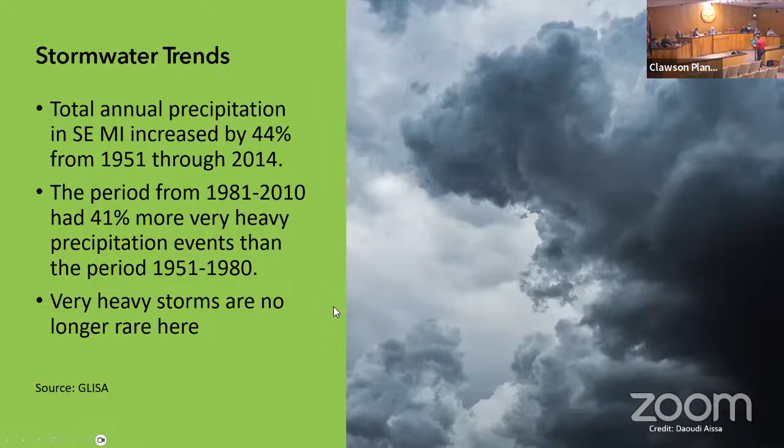So that's the context in which we're operating. A little more context, some basics. Water is carried away from local collection points by county drains, waterways like the Rouge River, and then sewers. In Clawson, nearly all of our water goes into the sewer system. We're a very built out community. We only have a couple little dribs and drabs of actual county drain that are even in our boundaries.

We don't have any open water systems like rivers or ponds that would collect water within our city limits. We're in the OAK drainage district of the Great Lakes Water Authority's 40-year wastewater plan, and that lumps us in with Oak Park, Royal Oak, Berkley, Birmingham, and a few other cities, most of Troy as well.

The boundaries of those districts are partially based on the watersheds. You can see the kind of ragged line around the pink there - that's the watershed boundary between the Rouge and the Clinton River watersheds. But then the other boundaries are political boundaries, like the north end of Troy and the boundary between Oakland County and Macomb County.

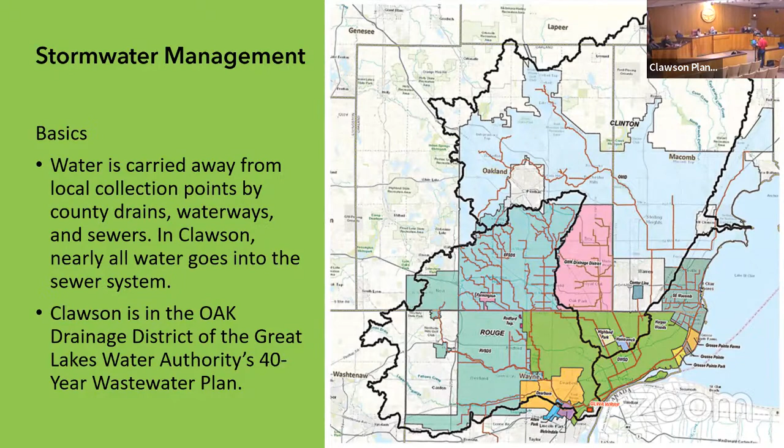We also, in Clawson and a lot of the cities to the south of us, have a combined storm and sanitary system. So you can see here, this is the full system - all the gray. The light gray is separated systems, so you have a storm system and a sanitary system. The dark gray is where you have your combined systems - all the storm and sanitary winds up in the same pipe when it's heading toward the water treatment plant.

Capacity downstream does determine how much we can put into the system without causing problems. There is a lot of capacity downstream.

Also important is that everything flows downstream, and there's a lot of things in the system that are further out than we are. But that doesn't mean that water is coming from across Maple and going right into all of our small pipes. There are large interceptor systems that take all of that water, so it's not like a totally cumulative effect coming down from, say, Auburn Hills through Clawson, through Hazel Park, through Detroit. You have larger interceptors that everything is directed toward.

So all of our pipes are going toward their various interceptors, and so is everybody to the north of us. Our water just generally goes downstream to treatment plants. There are about 60 treatment plants in Southeast Michigan, spread throughout the region.

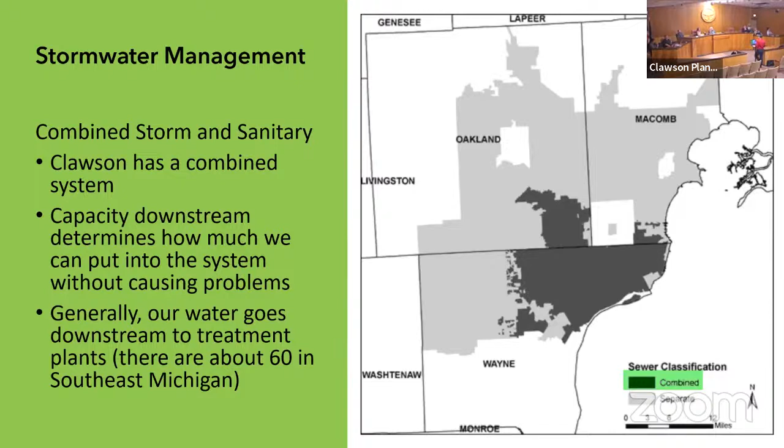Just important to know that our sanitary and our storm water collection is a combined system, so if you have an event that causes backflow, you might get some of both coming out of the system. That's the way it was done - if you look at the map across the country, older communities have these combined systems, and we don't build that way for a reason now. But retrofitting a system to separate those things is incredibly costly, because you literally have to replace miles and miles of pipes that are all underground. So it's not likely to happen anytime soon, let's put it that way.

We also have a little bit of a lead pipe legacy being an older community. This is a little less to do with sewer than it is to do with water, but a lot of our water service lines were originally made of lead. The city's been replacing them on a kind of as-we-go basis over the years. We don't really have that many left, but there are still some. So when an older building comes in for some sort of improvement, if we're looking at the water, generally we're looking to replace those lead service lines with a more modern material that is less likely to cause a problem if the wrong chemical gets put into the system, as happened in Flint.

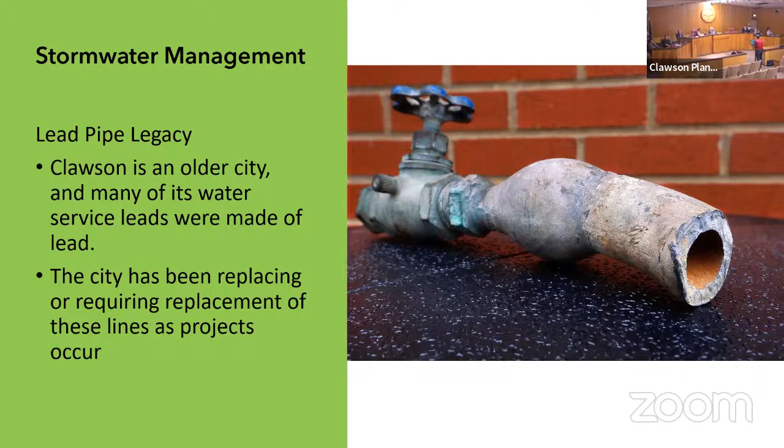So what happens when it rains? Soils matter - some soils are more permeable than others. If you have sandy or loamy soils, they're going to soak up a lot of the water. If you have clay, it's going to sit on top and roll off. We have a lot of fill in Clawson. It's not as bad as where I am over in Berkley - it's like all fill because it was a swamp once, and it's all this horrible packed clay, and the water just sits on top of it and flows.

Exposed ground absorbs water at a rate that corresponds to the soil type. So if you have a lawn or a forest area or something, whatever kind of soil you've got there is going to determine the rate of absorption. However, if you have land that's covered with impervious surfaces, pavements, or buildings, that water isn't going to be absorbed and it's got to go somewhere. So we have to figure out where to put it.

Hey Joe, can we ask questions along the way? Sure, yeah, absolutely.

So I noticed on, I think it's Rochester Road by the park in Royal Oak, when they're repaving, they almost have like this berm, and it's familiar to me in like northern Macomb and Oakland County, where it's where stormwater can collect and kind of flow alongside the roadside.

Is that something that we've considered? What are those called, first off? Well, what you're seeing there is probably a swale. You're going to see a diagram of it later in this presentation.

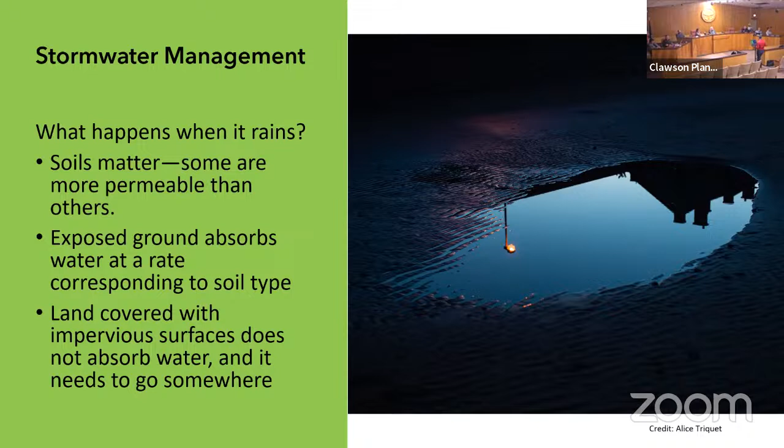But like we said, in the built environment, everything that's hitting those roofs, everything that's hitting those parking lots, everything that's hitting those roads — that water's got to go somewhere. And if it's flowing unimpeded, it will go there fast too. That's another thing to think about, because the speed of water influences the rate at which it erodes the things it's flowing over. So detention versus retention is an important concept to understand.

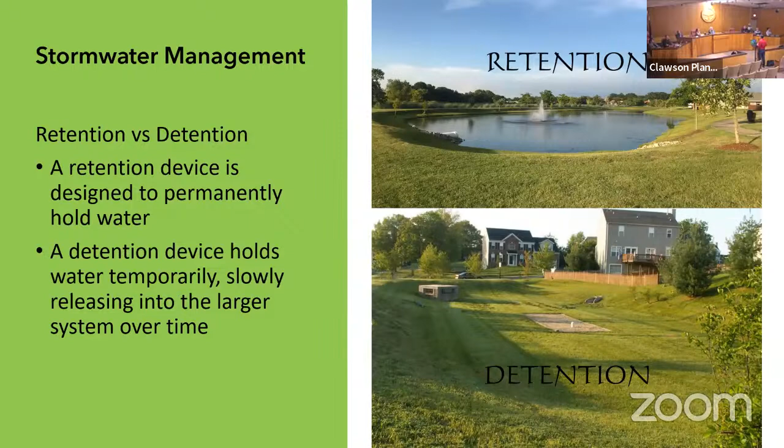So we can talk about different types of retention devices. Surface storage: you've got a pond on the surface, essentially. This happens to be a retention pond, but it just looks prettier than a detention pond, so I like the photo more.

It requires substantial land area because you do have to have the space to put that water on the surface. We don't have a lot of surface retention in Clawson because we don't have the space. The more pavement you have, the bigger the area of the pond needs to be. So when you have sites that are mostly paved out, you're not really leaving any area for the pond.

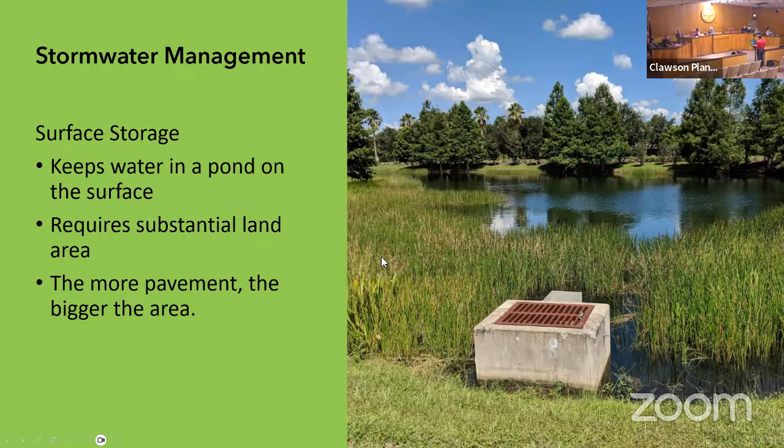Which is when we switch to the most conventional alternative, which is underground storage. So you bury oversized pipes or tanks underground to hold the water. This is our best option, generally speaking, just because of the nature of our community where we have a built-out environment. We have to find a place to put the water, and that's generally going to be under what you're paving, because other development can be placed on top. This will hold the water and gradually release it into the stormwater system and take it away from the city.

What keeps the water from flowing out at a high rate is called a restrictor valve. So you basically have a huge pipe that the water is sitting in, and then you've got a smaller pipe that allows the water into the storm system. It just restricts the flow so that it doesn't go in as fast and overwhelm the system.

Is this the standard for some of the new developments we've seen? They've said 100-year retention. Exactly, yeah. So when the parking lot was redone over at Ace, a system like this went underground below that parking lot.

I watched them do it. The Trader Joe's down on Woodward, they did it a few years ago. They put these huge pipes under the parking lot there, and it was quite a thing to watch. They were very, very large pipes. A lot of water can sit under that parking lot.

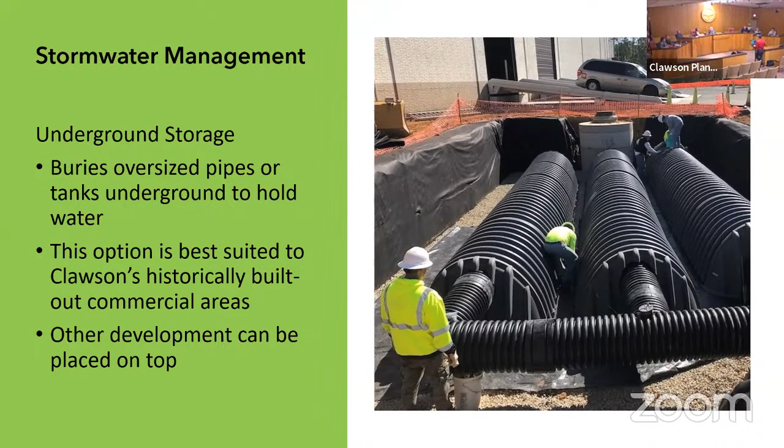Another thing we look at with these detention systems is water quality. You can have filtering devices in these systems, and they can come at either end. A lot of systems filter water as it enters the retention device, but you can also filter it at the point of release. The point of entry is usually the easier place to clean out, so that's the more common place to put it. Also, you don't have filthy water sitting around if you're filtering it on the way in.

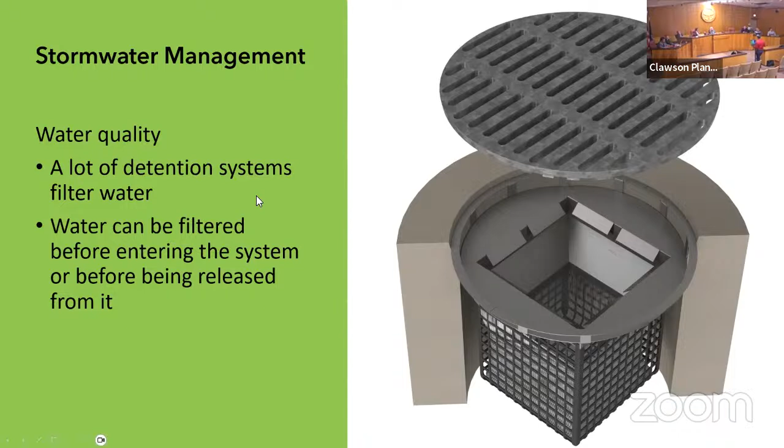But it's an access point to the system that facilitates maintenance. Typically, at the bottom of that manhole, you can climb down to an open channel. It might be an opening in a very small pipe, or one large enough to walk through. A lot of the scenes in The Third Man take place in the sewers of Vienna, which are massive chambers that are actually quite beautiful. A lot of larger, older cities have these incredible sewer networks—strikingly gorgeous old brick tunnels with a lot of headroom that you can actually walk through pretty easily. They even have walking paths next to the channels.

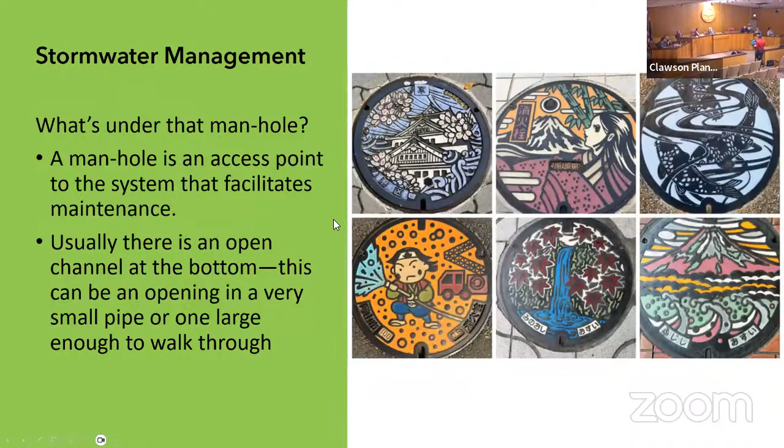So we have some typical infrastructure elements that you'll see. You'll see catch basins—this is an example of a catch basin. These can be in the middle of a parking lot, or over at the curb and the gutter.

Pipes, restrictors, which I was just talking about. Clean outs, which is a filter. You have to have a point where you can get in there and remove the filter, get all the crud out of it, and put a new filter in.

Gutters and curbs are part of the stormwater management system because they channel the flow of water. So if you have a road, it's pitched so that the peak of the road is in the middle and the water flows to the edges, down the gutters, and into the catch basins. The curbs keep the water from flowing off the road and onto people's properties.

French drains are another one. They're typically used in a yard that floods or something. It's a pipe that's perforated that gets buried, and as water seeps into the ground, it'll go into the pipe and be directed more rapidly away from the area that's flooding.

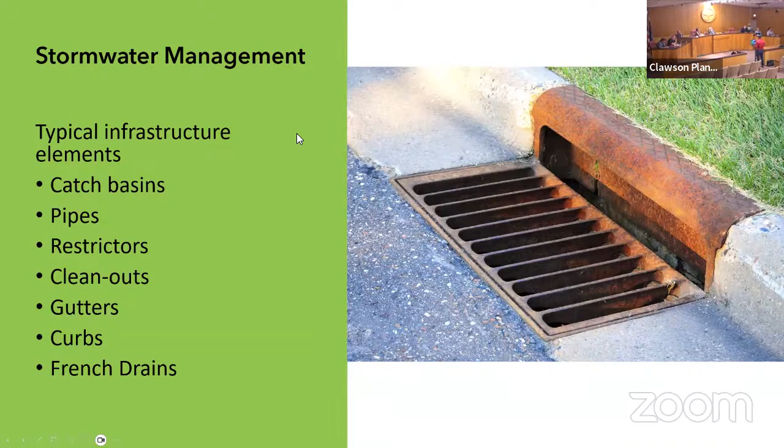We have to keep track of the condition of our stormwater infrastructure. So one of the tools we have to do that is these little robots, or lines with cameras on them, that you can run through the pipes and actually look at the physical condition of the pipe from inside the pipe.

And you can find cave-ins, you can find cracks, you can find obstructions, you can find just areas of buildup that you might want to look at removing—you might do that chemically, you might do that ultrasonically. There's a lot of different ways to do these things now.

But when you see the reports that we looked at a couple meetings ago on the condition of the sewer system, this is how we find that out. So you run these inspections periodically, ideally, and hopefully you're scoping your whole system over the course of whatever period you set. But this is really the nuts and bolts of how we actually determine what the condition of these pipes is.

So the city owns one of these? I think the city does have at least one. We have our own, yeah. I couldn't say the brand, but that's something we can get for you.

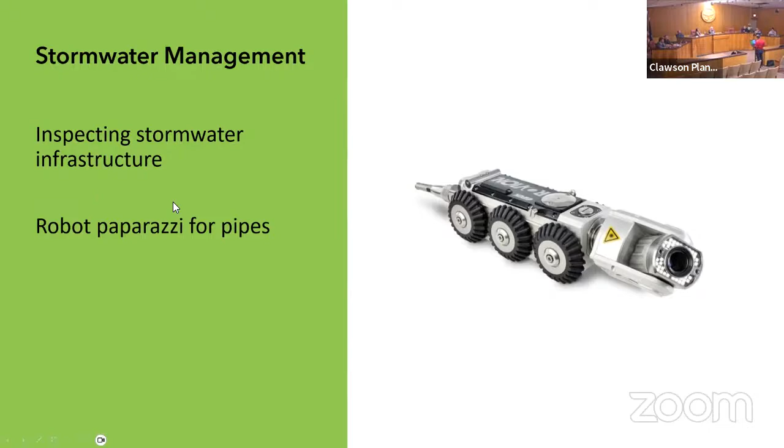And if you want to get really advanced with some of these robots, some of them are equipped with GPS, so you can get an accurate location—like, underground, of where the pipe is. So before digging, or if you wanted to get a sense of where your pipes were, you'd know exactly it was right here underneath the road or underneath the sidewalk.

Yeah, it's very useful. I mean, why dig up a whole area to try to find a pipe if you can just dig straight to it? You get the little beeping dot, like Alien or something.

So looking at a couple different alternative stormwater management systems, there really aren't that many of these because they're all kind of similar in various ways. You've got a couple of different bioretention options.

So you've got rain gardens. Generally what they do is collect water for slow filtering into the ground. The soil mix is usually chosen to filter out contaminants.

They do need to be cleaned because they tend to collect rubbish—water is designed to flow into it, right? So if somebody dropped a napkin on the ground in a parking lot or something, that napkin is going to ultimately end up in this rain garden. So they do have to be cleaned out. You can manage that with traps and filters at the inflow points, so you have less ground to cover when cleaning them up, but they definitely require attention.

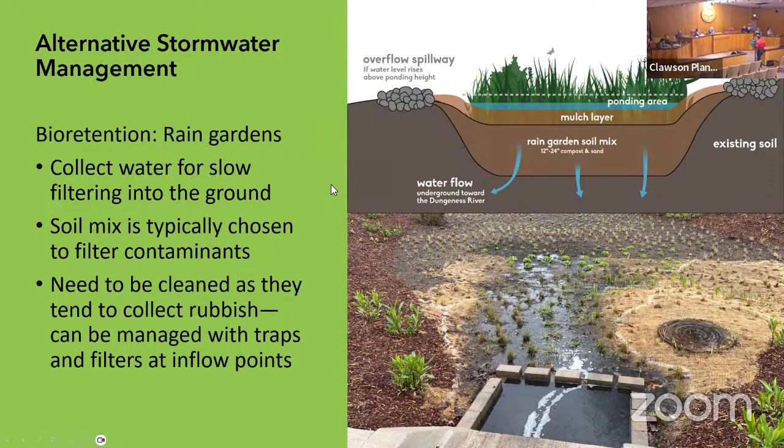The next item is the bioswale, which we were talking about earlier. It's similar to a rain garden, but usually includes a pipe to direct collected water that's been filtered—the same type of pipe you'd find in a French drain. It's got perforations in it so the water seeps into it rather than flowing in from an opening like a catch basin.

You have certain types of plantings coming down the side, and plantings in the middle where the water actually pools up. Those plants are generally chosen for a couple of purposes: one, they might slow or absorb some of the incoming water so you don't have as much of a rush entering the system; and two, since they're in the area where water pools, they're water resistant and may filter out chemicals or toxins from the water, holding those in the plants themselves.

Generally, you'll put some sort of engineered soil under the area that pools up, so you're not just using whatever topsoil is there. You have a specific mix that allows water to infiltrate while pulling out chemicals and toxins through biological processes. Typically the perforated pipe is surrounded by gravel, which allows water to flow through to the pipe. There's generally some engineered soil below that as well, so you're continuing to filter the water as it moves past the pipe toward the water table.

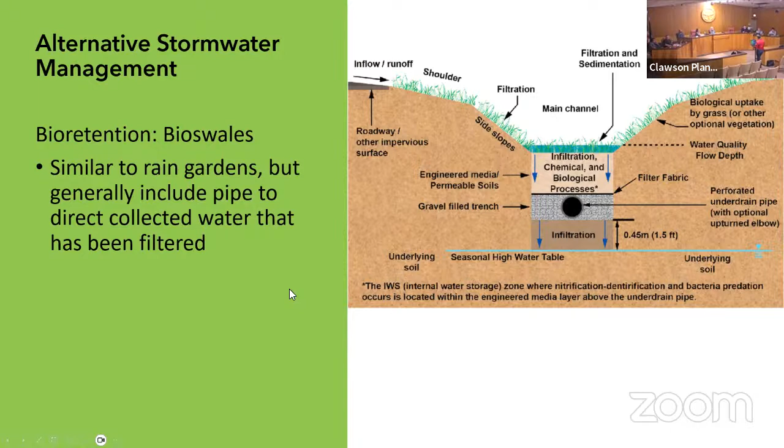Rain barrels are a less natural way of capturing stormwater during a storm event, keeping it out of the system for a little while. If you just leave a barrel open, it will gather about 3 inches of rain during a storm. But if you have gutters running along your garage and hook your downspout to a rain barrel in the back, you'll capture everything that hits the roof, and the whole barrel will fill up in a single storm.

That's a lot of water—all water that's not running down the driveway into the catch basin and potentially contributing to a system backup. It can also reduce usage from the water supply system, since water is brought to properties through a different set of pipes. If you're watering your garden, you can just use water from your rain barrel rather than turning on the faucet and using water from the system—essentially retaining it for elective use at a later date.

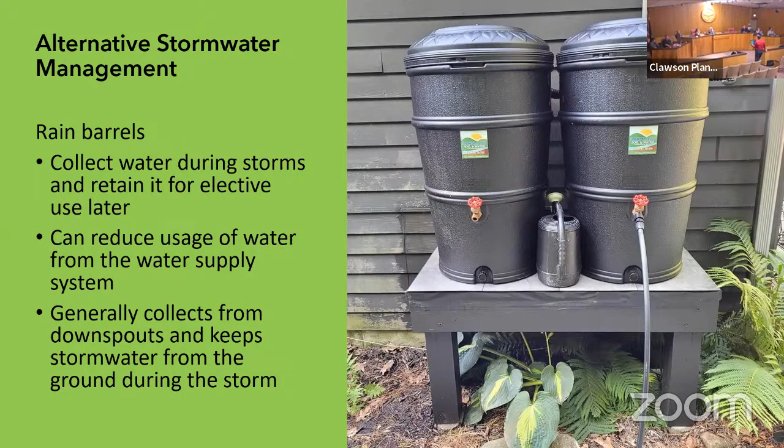Similar to that is gray water systems. This is really less a matter of managing stormwater as it is a matter of managing other water that's going into the system. So if you're keeping some of the stormwater from entering the system and keeping some of the water from your bathtub or your laundry room from going into the system at the same time, you're reducing the overall burden on the sewer system. So this only works for certain water that you're sending out.

Generally what you have is these three-way valves that do some filtering, and they'll send the filtered water out, and the less filtered water will go to the sewer. But it preserves some of the wastewater from a building and allows that to be used for, say, irrigating the landscaping. You can actually also recycle it and use it to flush toilets and things like that. There are buildings being designed that way now. But it's just one more way we can contribute less overall wastewater into the sewer system and keep the overall levels of water down so we don't get overflow events.

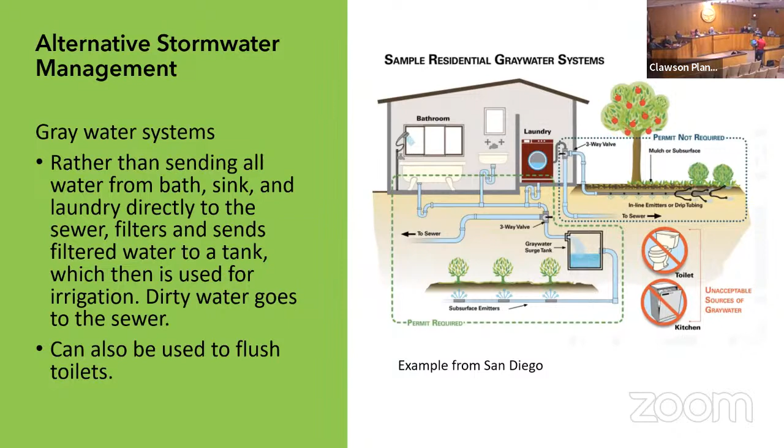Green roofs are another thing. These are actually sort of more similar to the bioswales. This is the Central Bus Depot in Chester, England. I was there this summer and it's really cool when you're standing around underneath it. This is an absolutely huge green roof. Water that hits a roof usually goes straight to the ground or the sewer. This green roof will hold water for use by the plants growing on the roof, and you can hold it in the soil for eventual slow release if there's too much water, for the plants.

But this building - it rains a lot in Chester, England, like a lot. And this building contributes a lot less water to the stormwater system than all those buildings around it, just because it holds so much on the roof.

Now, obviously, there are structural considerations there. You can't just take the roof of 1 East 14 Mile and expect to put a green roof on it, because it will collapse. But if you build the structure properly and you have the correct reinforcement, you can put a green roof on it. There are lots of examples in this area.

If you want to see a kind of cute demonstration version of it, in Innovation Hills, the park in Rochester Hills at Hamlin and Adams Road, there's a little pavilion that people can have parties in, and it's got a green roof. They actually have a display next to it that shows you all the layers of the green roof. It's pretty cool - a nice way to see it up close.

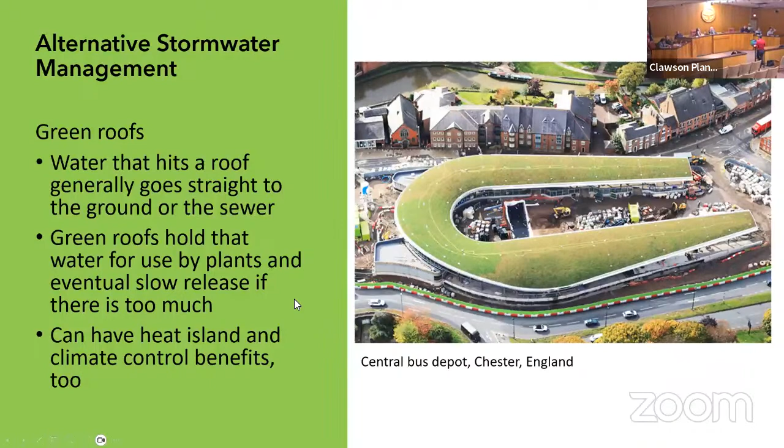This is, I think I've mentioned before, my favorite low-tech lazy man solution. Leaving a little bit of leaf litter on the ground over a given area decreases water reaching the ground during peak storm intensity. Depending on the type of leaves you've got, it can decrease the impact of water during peak storm intensity up to 50%, just from having a couple inches of leaves on the ground. So the water is not hitting the ground and building up before it has time to percolate, just immediately flowing - it's being absorbed by that leaf litter before it hits the ground.

And it just diminishes the overall impact of the peak of the storm. It can also absorb or slow some of the flow.

So if your neighbor's property is a little higher than yours and a lot of water flows off of it—like my neighbor's house is higher than my lot—I always leave a pile of leaves back there. Ever since I started doing that, the flooding down the side of my house is a lot better. It's really easy to just leave leaves where they are, or rake a few of them into a pile if you don't get them naturally. It actually does help some. It's not going to be a panacea, but a little bit here and there can have a pretty large cumulative effect.

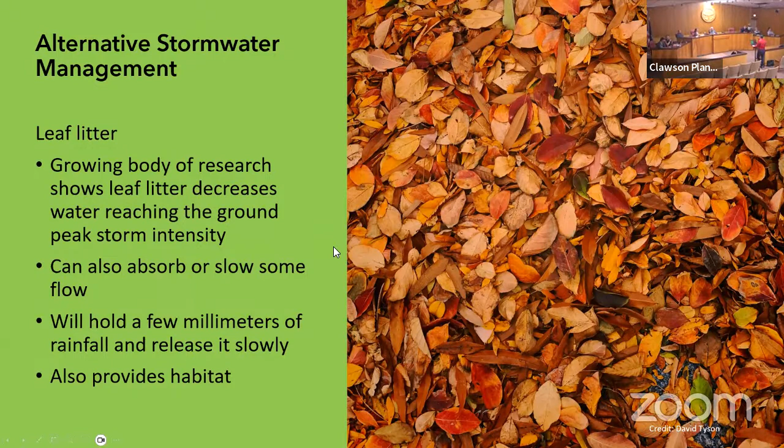It also provides habitat for certain creatures over the winter. And then finally, if we can find places for green space, landscaping, and plants, that's going to provide more potential infiltration points.

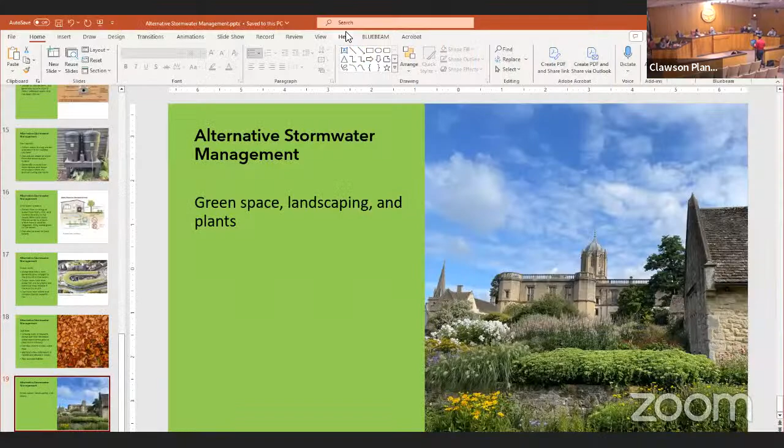So we look at our community and we've got a lot of pavement. But as things redevelop over time, there are probably going to be opportunities to get a little island here that could support a tree or some bushes or fountain grasses, whatever it happens to be. Every little bit helps keep water out of the system, and the system is less prone to failure for every little bit of water you keep out of it. So that's the overall message: the less you're feeding into the system, the less prone to failure it's going to be.

And as a corollary, the slower you feed water into the system, the less prone to failure it will be, because it's going to handle that slower flow of water more easily than it would handle a catastrophic influx.

Do we have anything like that for newly platted sites? I just recently noticed the Shalom site is for sale. No, we don't have that yet. There's going to have to be retention on that—whatever gets built there will need to retain its stormwater. They can do that in a basin if they've got the room based on their design, or they could do it underground. They could implement some of these rain garden or swale ideas if they're so inclined.

How does that work—is it only if it's sold as listed, like 8 acres? I thought it was like 7, but if they break it up into 6 different ones, each one...

It depends a little bit. If you sold it off as individual lots, you might have more of an individual lot standard that you had to apply. But if they're designing and building it as a plat or a site condominium or some other type of subdivision, then they're going to have to do on-site retention for the full site.